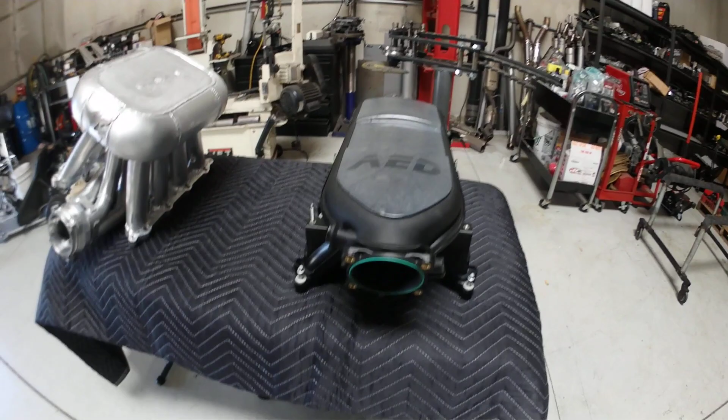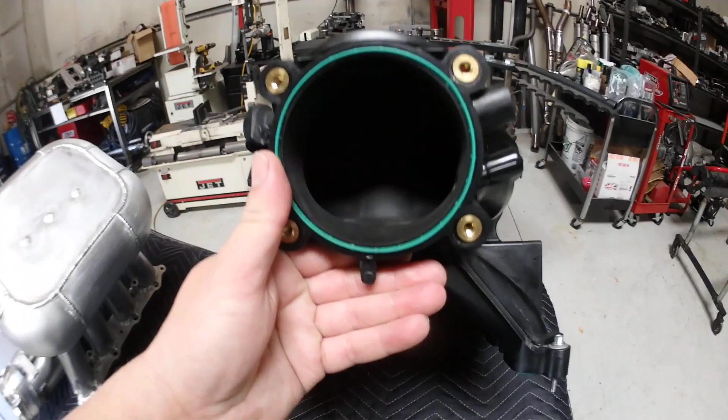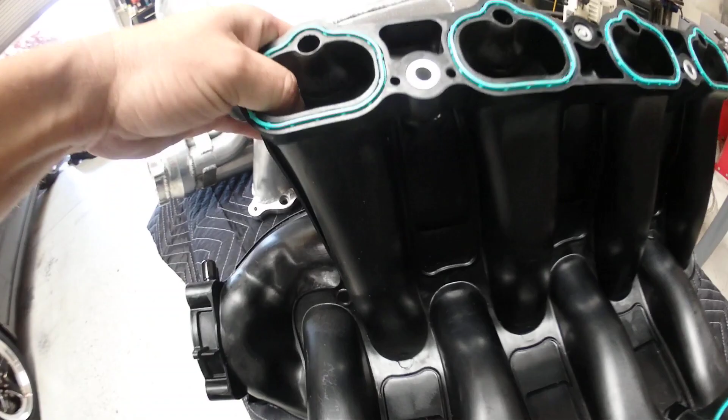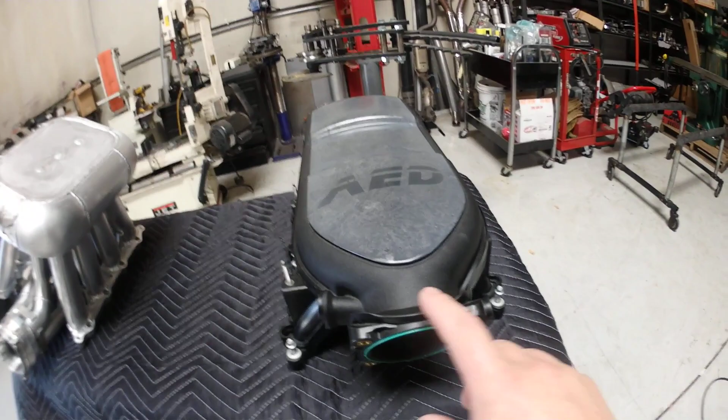Control manifold is the tried and true Boss from Ford. This particular manifold has been fully ported, smoothed by Brett Barber, and then done again in-house at AED. Specs for this particular manifold can be found online. It is roughly 600 cubic inches in total volume.

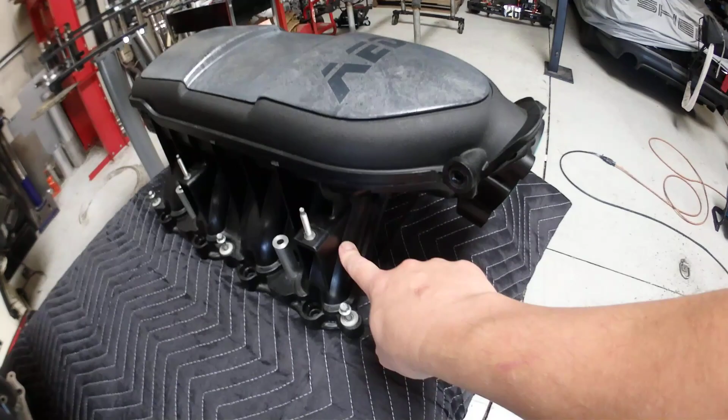Spec is just under 30 cubic inches of volume per runner. These have been increased slightly. Plenum volume just under 400 cubic inches. Runner length listed at 9.3. Measurements in-house show 9, but they're crude measurements.

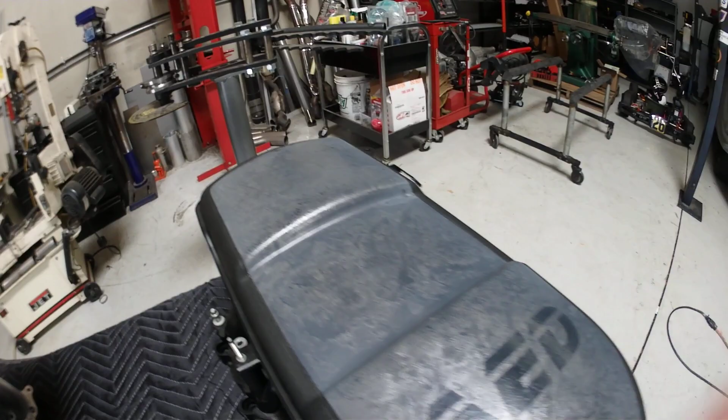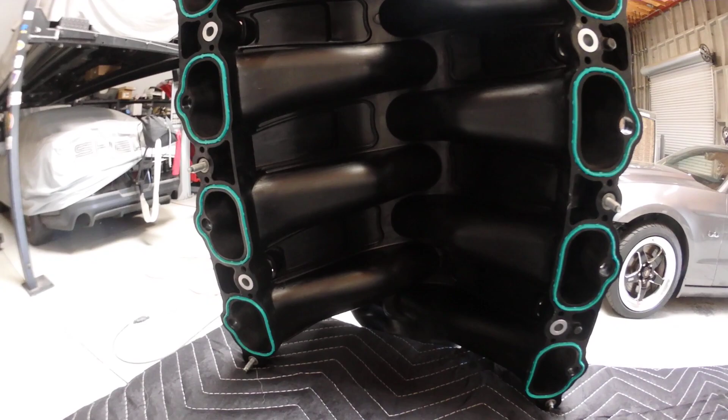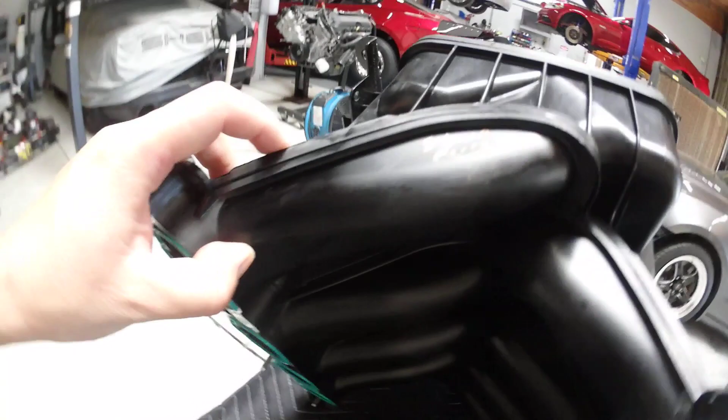Runner design is stacked one on top of the other in order. So you have an oval, 8 ovals next to each other in line that then transition from a long oval to narrow and then go wider. This transition here is difficult to get volume out of. Overall, an exceptional design.

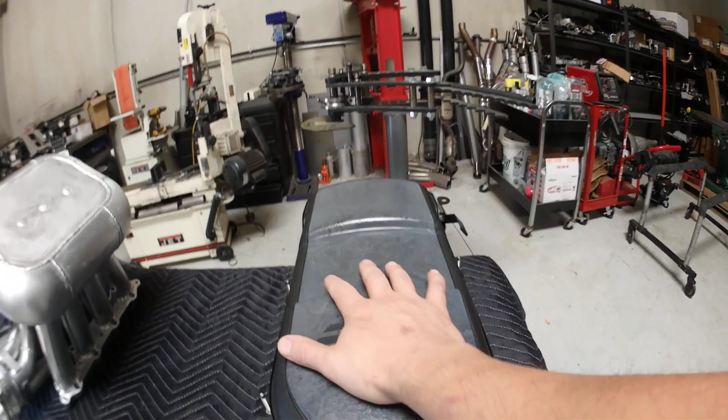Due to the way they're stacked, there's a V here. Forces air as it's coming in at 115, 120 miles an hour with boost. Forces air around it. It actually does a decent job. I should not say decent. It does an exceptional job on the vast majority of engines up to and including 1200 to the tires, with some revisions, paying close attention to airflow distribution by the tuner.

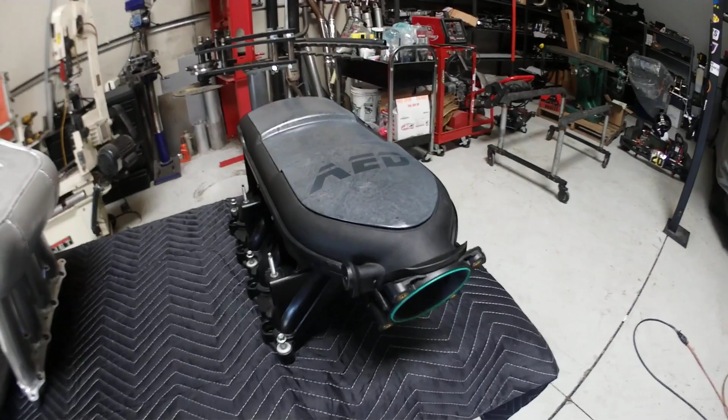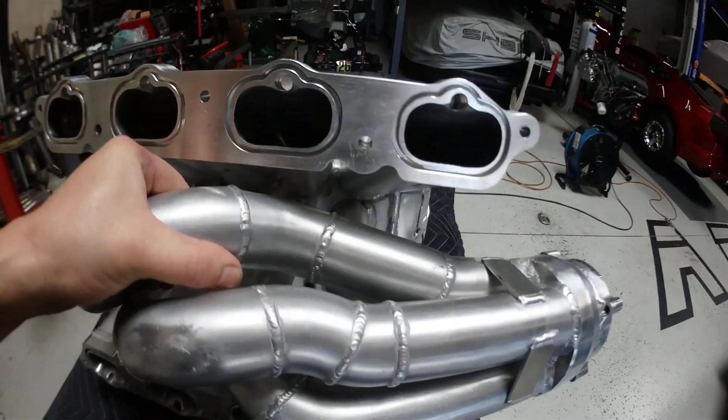The proof of concept manifold is here. This manifold is 400 cubic inches larger in total volume. The runner length is 9 inches. We transition from round to oval. Volume is 34 cubic inches per runner. Of course, fully ported to match the heads being used on this test vehicle. Can be opened up more.

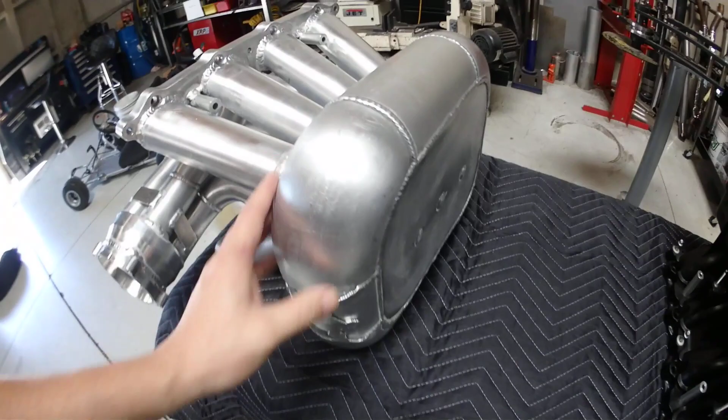The flange exit at the head is smaller than the inner volume of the runner, so this can be used on larger heads. We have velocity stacks internal. The plenum volume is 570 cubic inches. Nearly double the engine.

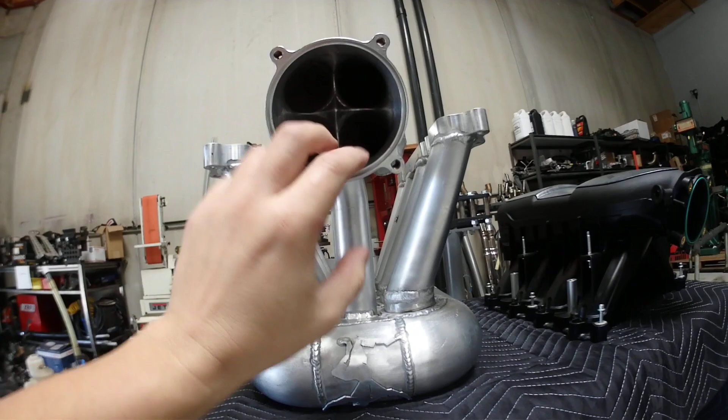The key to this manifold is here. We have a, this would normally be a collector on a header. It's made out of aluminum, it's custom, and it's reverse. This is where the throttle body mount goes. We're dividing the airflow into 4 evenly. The area of this internally multiplied by 4 matches the throttle body.

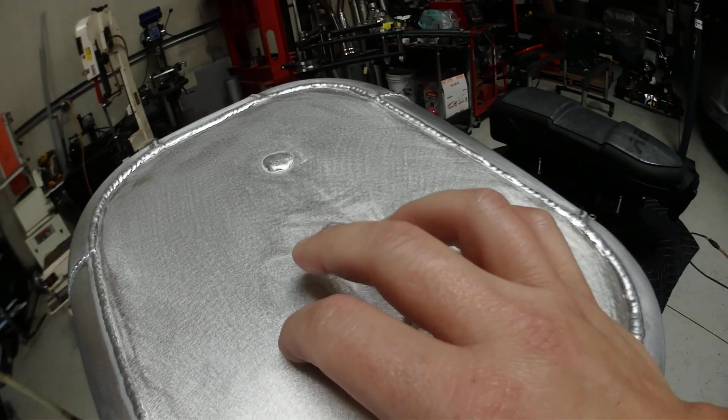We divide this and then straighten the air before it runs into the manifold, where it slams into the roof. There are some design features internal that we will not get into. The theory is the airflow comes in under pressure at 115-ish miles an hour.

The velocity of the air can be calculated by simple math of the pounds per minute of air, the diameter of the tubing, how much the displacement is, blah, blah, blah. And you can also calculate the back pressure in the engine, what the engine's using, back pressure being boost.

Theory is it comes in at 115 miles an hour, slams into the roof, kills the inertia, or at least kills the inertia in the direction of travel where it came in, so it does not overly feed the rear cylinders. Airflow spreads out as there's a pressure drop going from the volume of this diameter here, roughly 8.9 square inches, to this huge volume of 570 cubic inches.

That way we then can build pressure, which will take slightly longer than building pressure in this, but this is a drag race car, so it doesn't really matter. And as the pressure builds, the engine is now fed with a straighter shot.

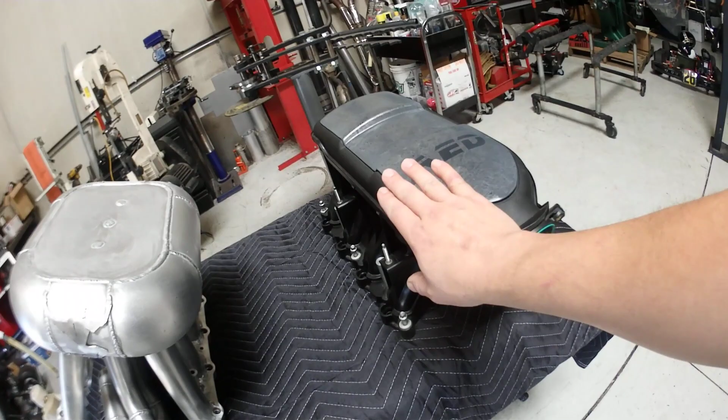Runner length was kept the same as the Boss to maintain the RPM band, which is, in my opinion, near perfect. I would have liked to have gone 10 inches, 10 and a half, but the requirements for space didn't allow that. So this is as long as we can go. Volume increased beyond what the engine is likely going to flow.

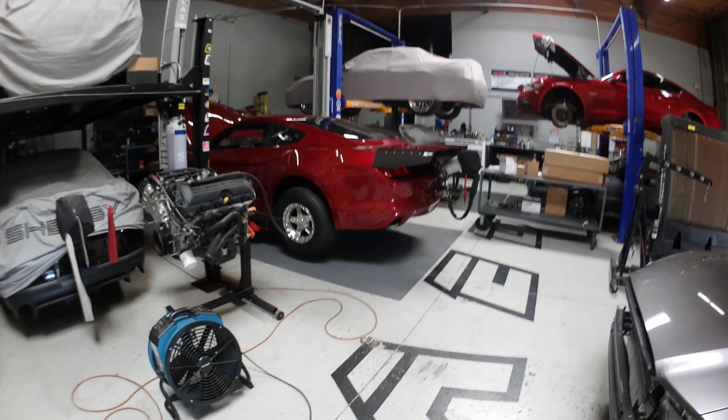Test vehicle is over here. Many know this. It is a 2016 Mustang. It's now a race car. We have no passenger seat, race seat, no back seat.

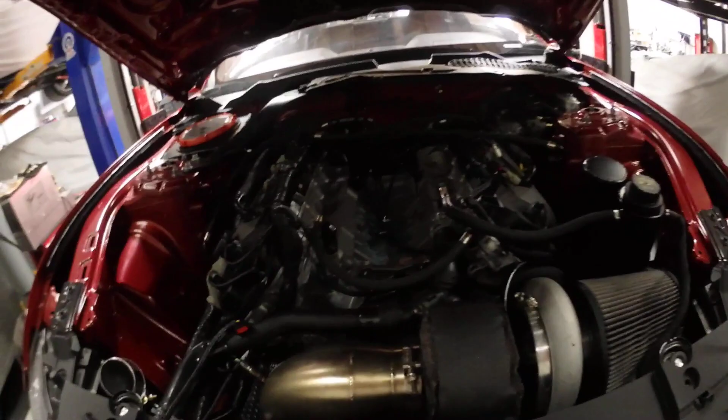The engine, it is dark, and I apologize. Let me get a flashlight here.

Sorry, I'm not good at editing, therefore you're going to wait for me.

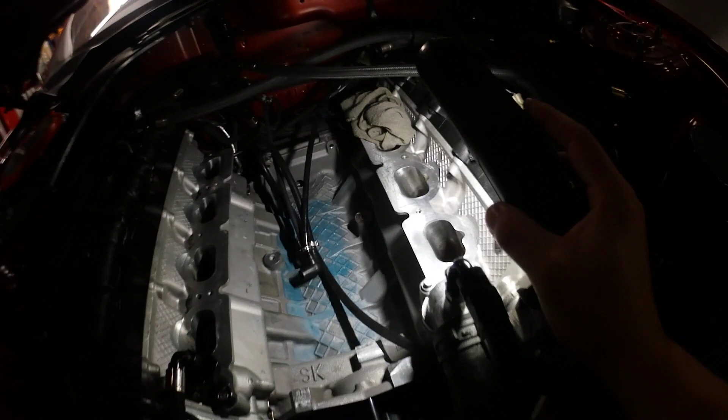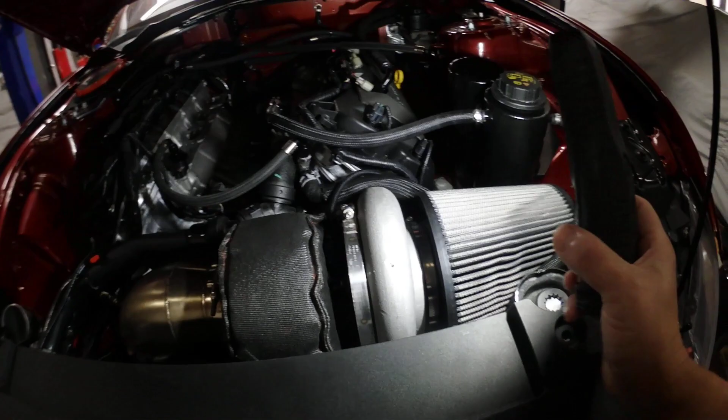These heads have been ported. These are Gen 2 factory heads that came on this. We have a built motor. It's 11-to-1 compression using the Ford Racing block. This is a single turbo CPR kit, 8596 turbo. I'm hoping we do not run out of turbo for this test. I'm hoping I haven't already run out of turbo for this test, let's put it that way. This motor is being run on Ignite Red.

The control test results at 26 pounds of boost with 18.5 degrees ignition timing on that chassis dyno with these wheels and tires, the radials, put out 1396. I couldn't get RPM, but I have mile an hour. It's a beautiful curve.

The next step will be installing the manifold, leaving the boost controller alone, not changing anything, leaving the ignition timing, the cam timing, the fueling all alone. We'll be increasing the manifold volume to 19 liters. Manifold volume is the spec between the mass air and the injector or the valve. This is for the ECU to calculate how long it takes for the air to travel from where it is measured to the engine. That's a minor but critical change.

We'll also be removing all fueling for individual cylinders that have been changed for the Boss manifold, and then reading the plugs after the runs. Do our best to maintain back-to-back and accurate results. We will not be using ice in the intercooler. We will not be using anything other than a fan to make sure the engine stays cool, and there will be no tricks of any kind. The tire pressure hasn't been changed or anything like that.

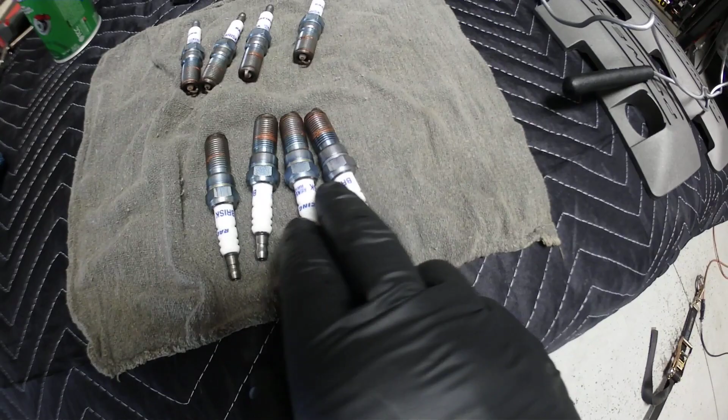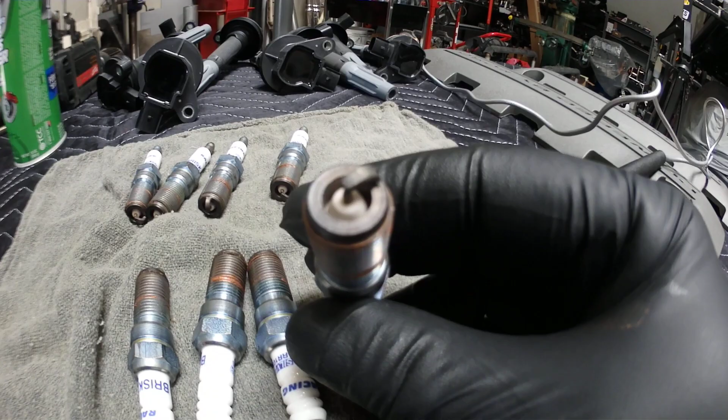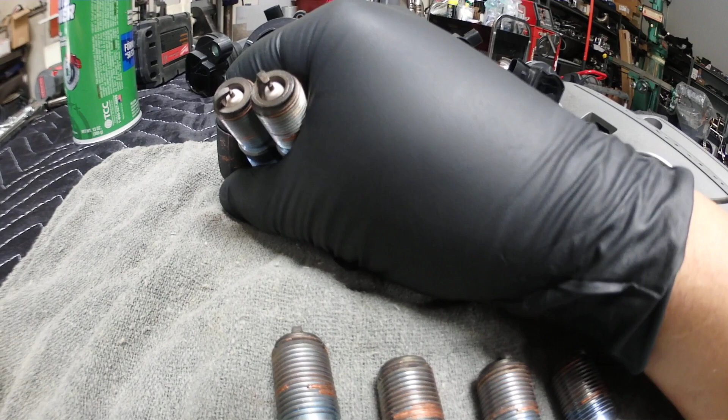Document the spark plugs, the color on the plugs, verify fueling with the manifold swap. This is 1, 2, 3, 4, 5, 6, 7, 8. Color on the plugs. You're not going to see in the video very well. They look extremely even, aside from one cylinder. This is 7 and 8, number 7. Actually, number 7 is a little bit different colored on the Boss manifold tests, and it's cleaning up now.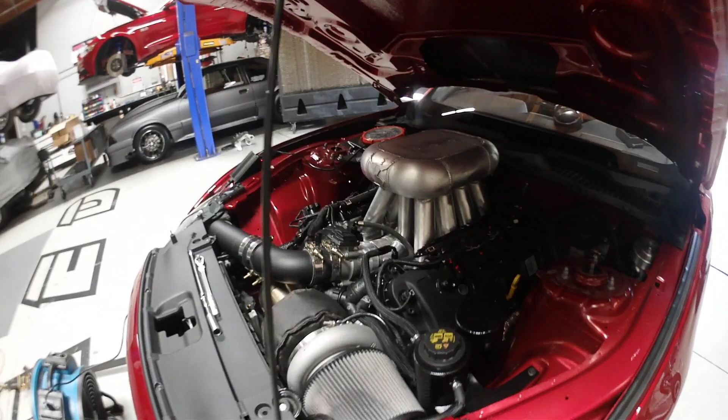No tricks, no nothing. We did make a couple of pulls. I'm going to put them back in now that I've verified, review the data. We had to add a little bit of fuel throughout the entire curve. I'm going to make sure it's correct before I finalize everything and show you guys the numbers.

I've got data for the manifold swap, the proof of concept. I don't sugarcoat anything, good, bad, or ugly. This is a win because of even cylinder distribution. Plenum made more up top at RPM. We were comparing against one of the best manifolds out there for the price for boost, which is the Boss, and when it's fully ported and done right, it's excellent.

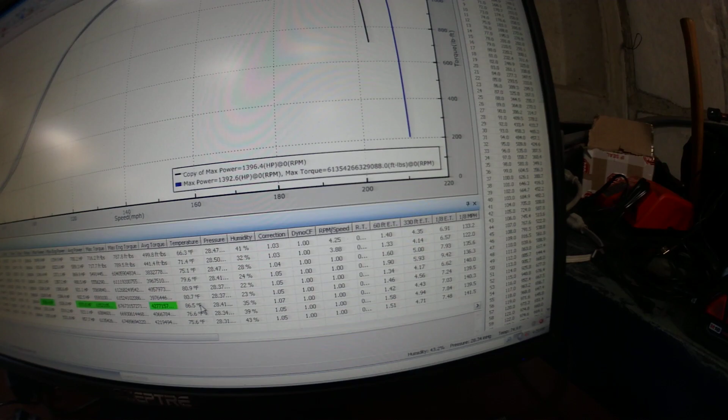Here's the numbers and the curves. Okay, so the Boss made 1396 the other day. SAE corrected is 7% correction. Doesn't really matter, everything's accurate.

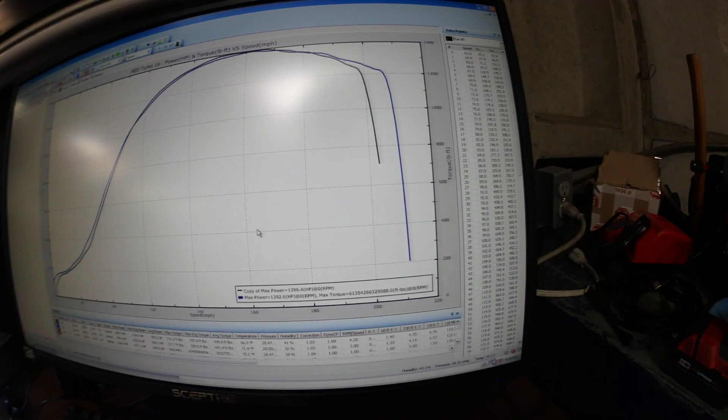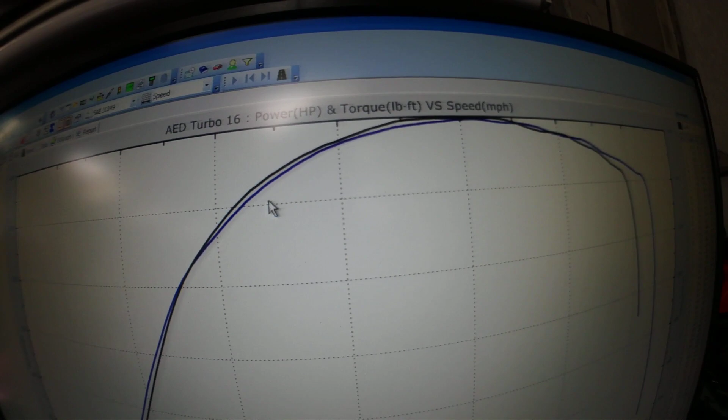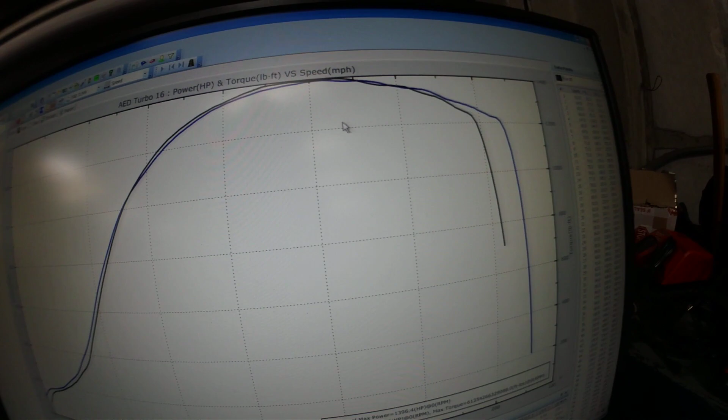The Atlas manifold at the same fueling, same ignition timing, same cam timing, same boost control setting, made 1392. Blue line is the Atlas, so it actually is outpowering the Boss as it's coming into boost, and it dips down a little bit. Peak torque-ish area, data logging, or dynoing versus speed because I can't get my optical to work. Anyway, up top, the Atlas is outperforming the Boss as expected.

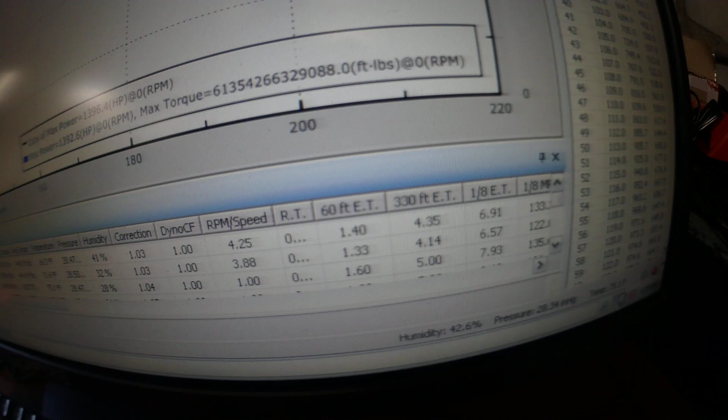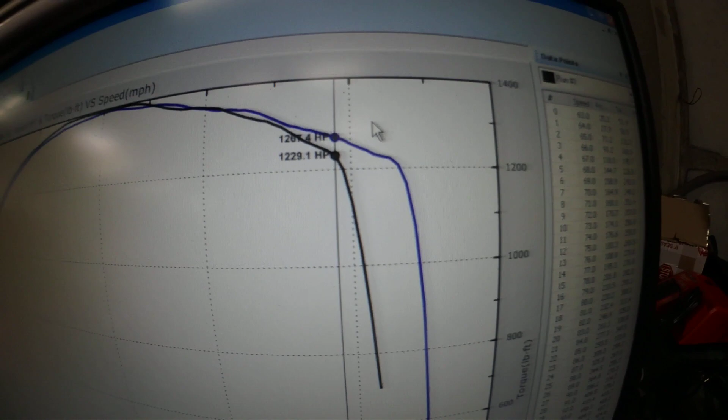Now this is 210 miles an hour, so I could use a gear change. I never ran the Boss higher than 8,000-ish RPM, and this run was 8,500 for the Atlas. So yeah, it makes more at RPM. Is it usable? I don't know. Probably if I want to spin it that high. I'm shifting at 7,500 currently, so I'm sure shifting it higher will work.

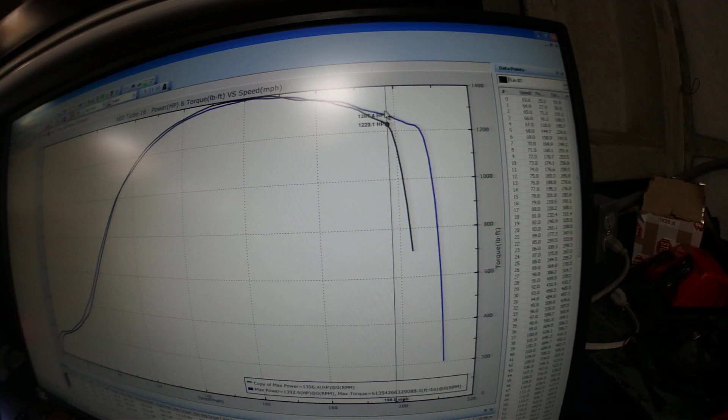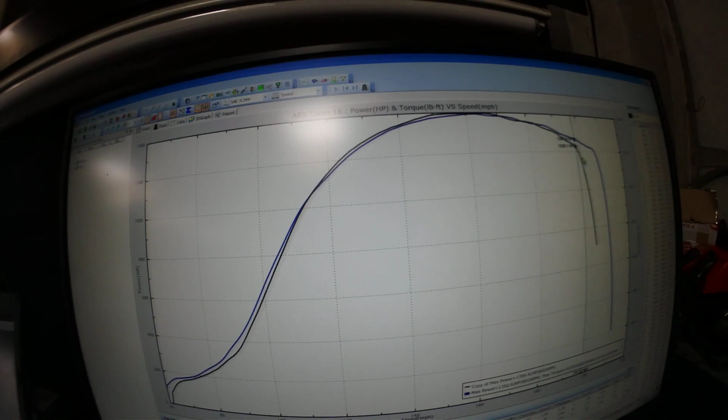This gain is absolutely due to the larger plenum volume. The lack of a loss down here is absolutely due to the long runner length. So both of those are a win. The third win is the even distribution of airflow to all 8 cylinders. The spark plugs look even, airflow looks even. Obviously there's not huge dyno gains, but there's more data to sift through, and let me go through that here.

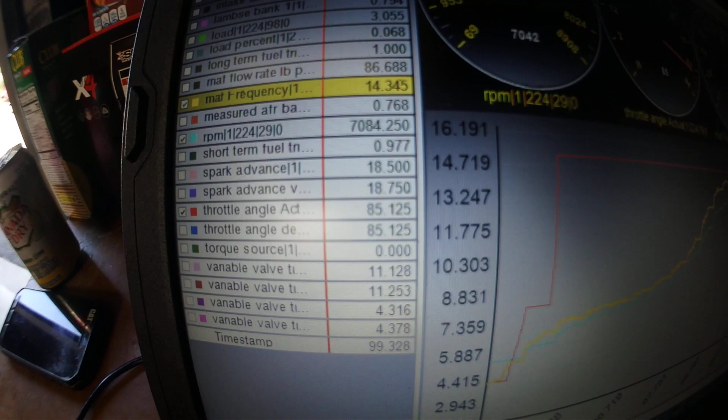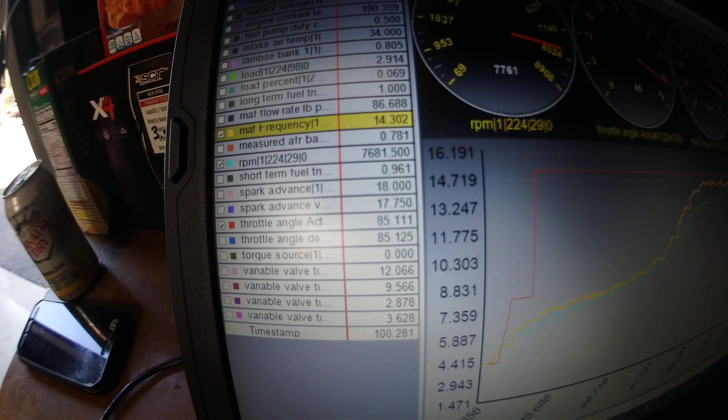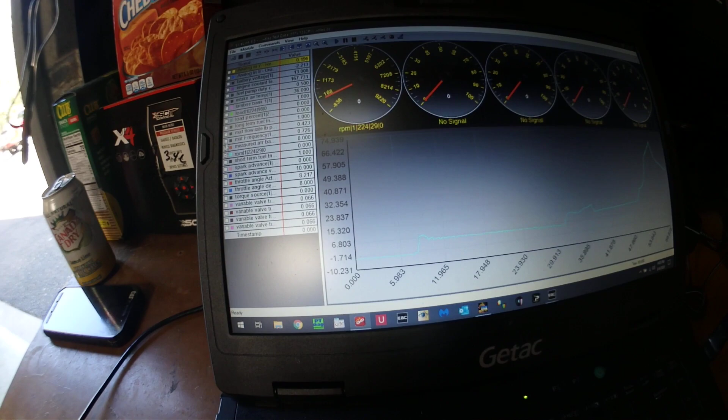This is the Boss data log. I'm going to show you MAF frequency, yellow here. It goes up. We're 14.25, 14.4, 14.3, 14.4, 14.7, 15, there we go. Okay. So it's just trickling in that area, averaging mid 14. Let's pull up the Atlas at the same. We'll do MAF frequency again. Zoom in. Zoom in further. Okay, this is the curve.

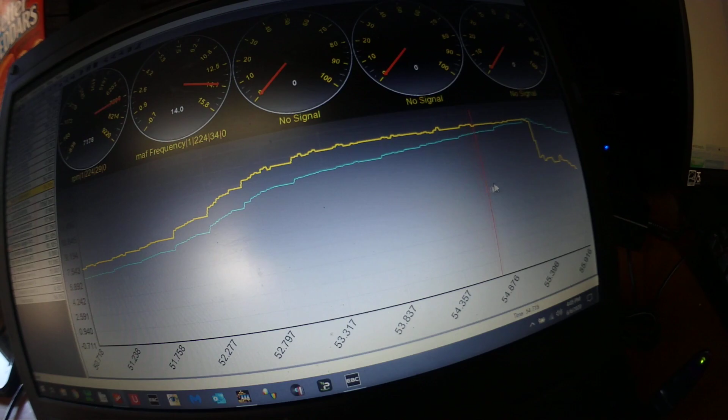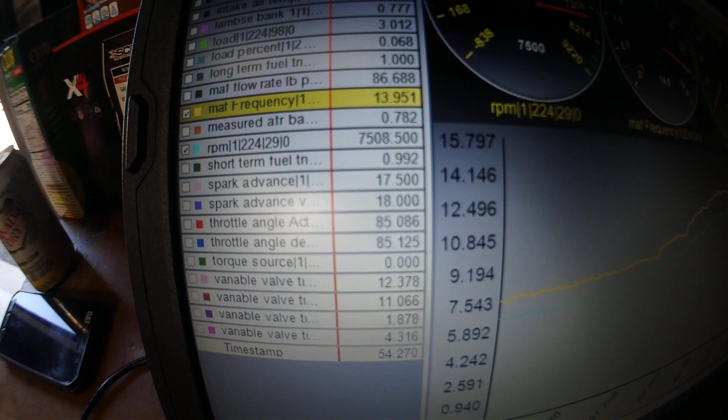Now watch, we're 13.3, 13.9, 14.0, 14.0. We are 14.1. Okay. 14.3 we hit right there, right? And 14.2, 14.1. Okay. That means less airflow. That's the mass air sensor. I didn't move it. It's in the exact same spot. It's the exact same sensor. It's in the exact same tube. It's in the exact same orientation. So we're not seeing as much airflow and making basically the same power and even more at RPM. That's a win.

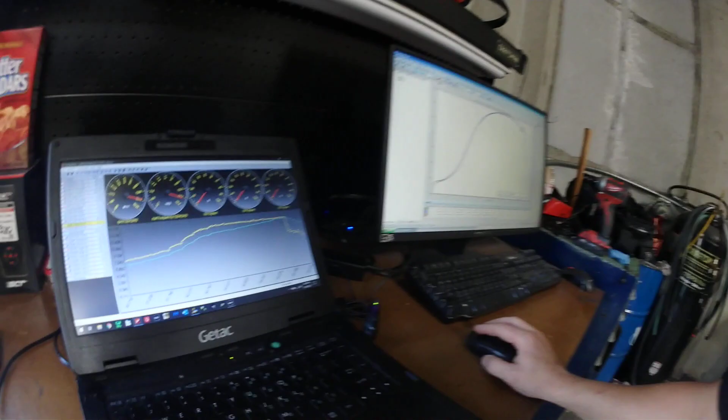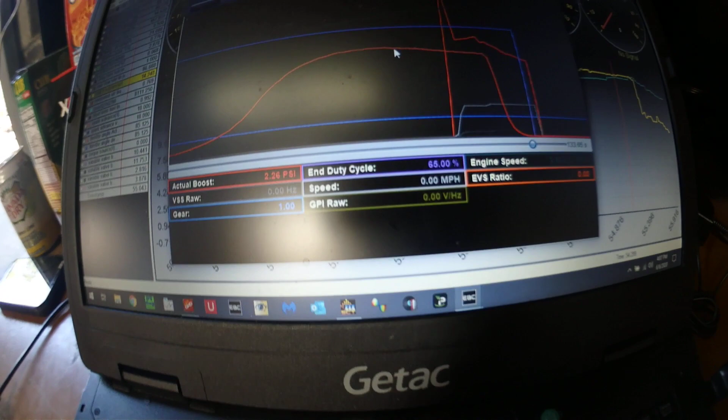I did try to turn up boost, and I think we're just out of turbo. This is an 8596, and I was a little worried that we'd run out of turbo, but whatever. Let me show you how much boost we made to make 1392 with the Atlas and how much boost it took to make 1396 with the Boss. Okay, hold on here, let me get that log up. Okay, this is 1396 with the Boss. All right, pink here is the boost curve. And it comes up, 65% duty cycle, by the way, right there. So you can see when we get to the other one.

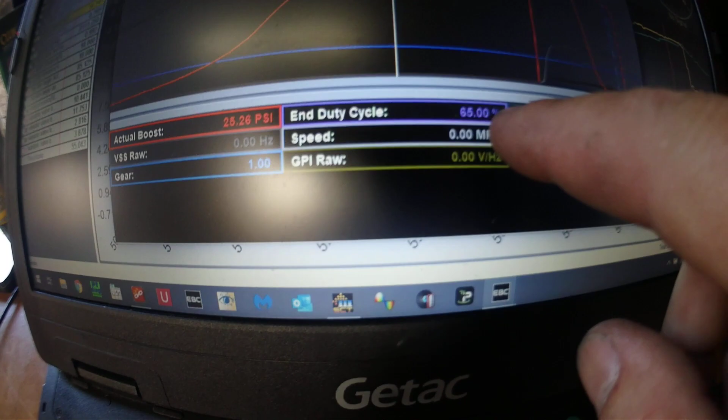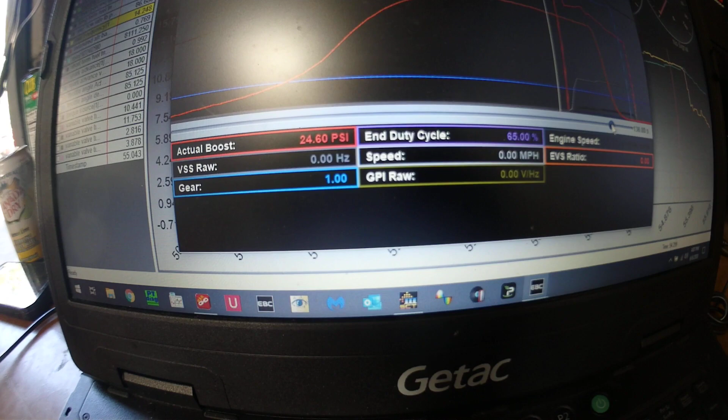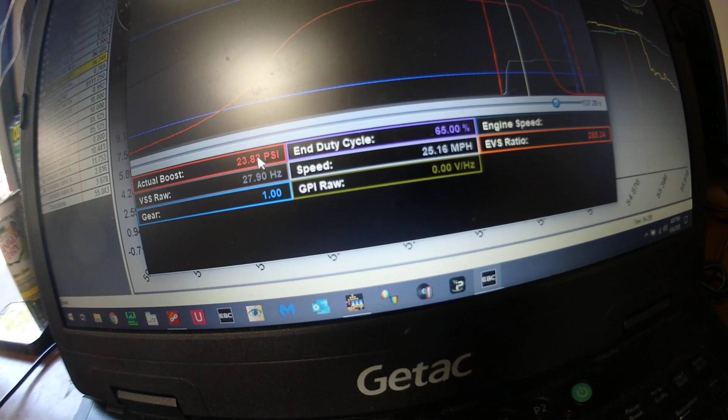Let me get that glare off. All right, anyways, 25.26, 25.7, 25.5, 25.2. It starts dropping as RPM is up at 7,800. So by 7960, roughly 8,000 RPM, it's 23.88. Okay, that's 65% duty cycle.

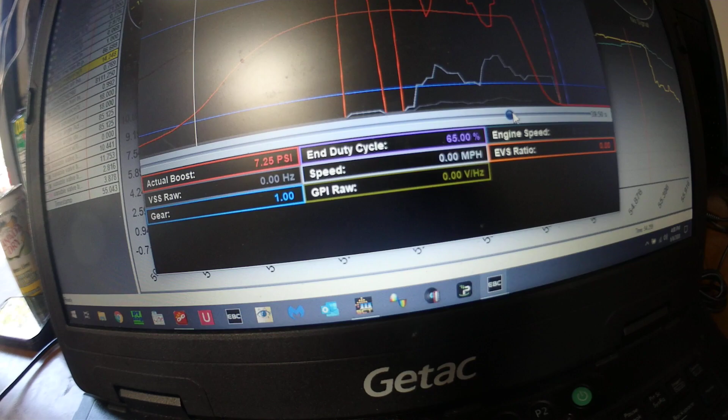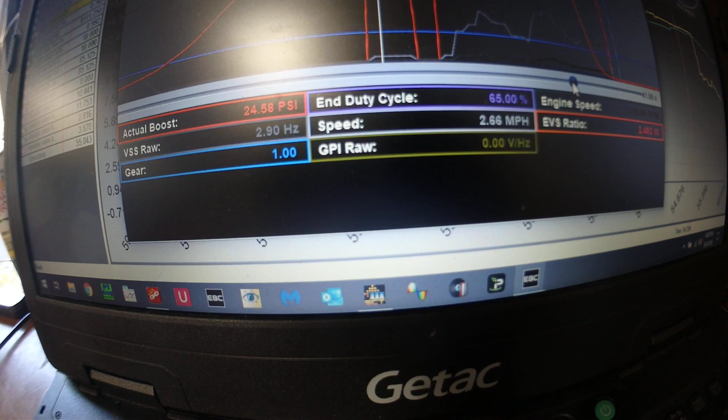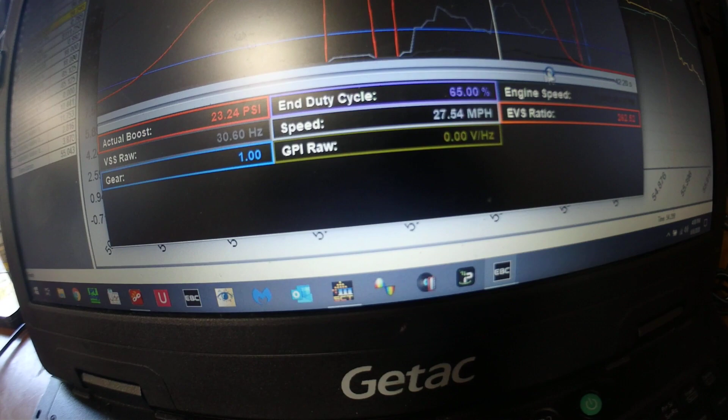Open the Atlas. Okay. Again, pink. Notice 65% duty cycle again right here. And, just so you can believe me, oh, they don't have the time, whatever, it's the day. So we're at 23.64, 24 pounds of boost, 24 and a half. We don't even hit 25. Not even 25 pounds of boost. By 8,000 RPM, it's down to 23 and a quarter. So we lost boost and lost airflow, and yet made the same power.

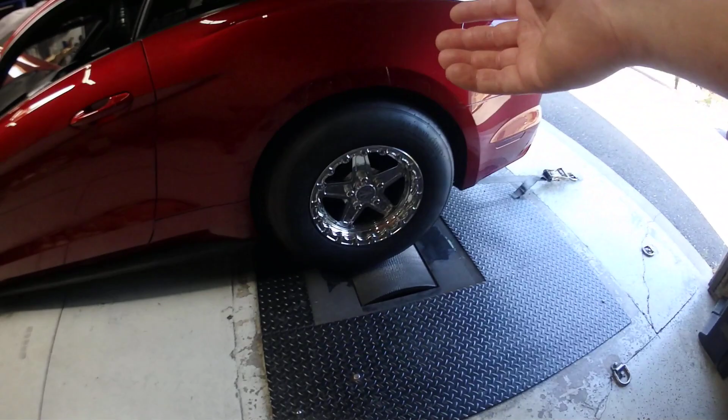That is not even 25 pounds of boost to make 1,391, 92, whatever, on this inertia drum with radials and a Powerglide with an unlock converter, and the gearing is pretty wrong for what we're doing with this. Anyways,

I think the Boss is an excellent manifold. Honestly, it's fabulous. Up to a certain point, if you really want to read plugs and get everything dialed in, which we've done for you guys out there, we know which cylinders are running more airflow and which ones have less airflow. I wanted to get rid of that, and I did. So essentially, we increased efficiency. Less boost, less airflow, same power. I think I'm going to need a bigger turbo to make more power.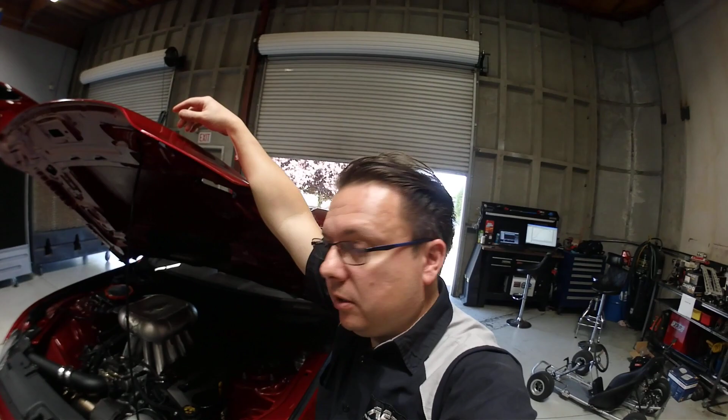Chatting with the guys over at Forced Induction, they told me this thing would be good for about 145 pounds per minute of air. We're at 1,400 almost to the tires. What do you think? I'd say we're there. So anyways, take it to the track, turn it down, get some seat time, and have some fun.